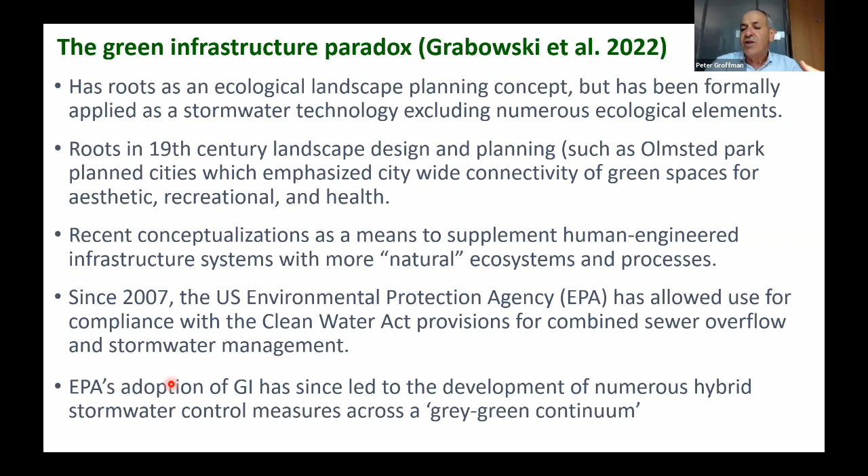Suddenly, all kinds of people, whether landscape architects, designers, artists, engineers, or regulators, said this is great—we can use these approaches to solve our stormwater problems and also provide all these other ancillary benefits. So how is this specified?

There's an important distinction between gray infrastructure and green infrastructure. Gray infrastructure is pipes, and that's been the traditional approach—you collect the water off the street and pipe it somewhere else. If you pipe it into the sewage treatment plant, when it rains a lot, the plant overflows. Even in cities without combined sewers, you collect the water off the street in a pipe and dump it into the stream, which really degrades the stream. So there were lots of drawbacks of gray infrastructure.

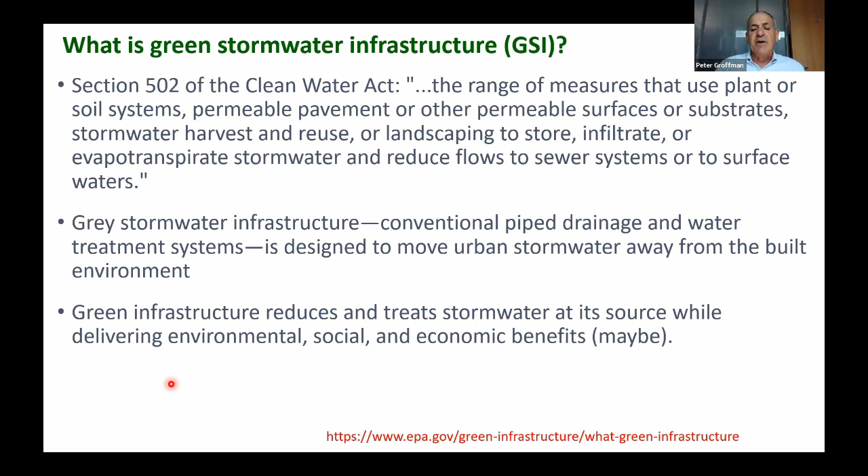The idea was maybe with green infrastructure we could collect and treat the stormwater at its source and deliver a wide range of environmental, social, and economic benefits. That's the idea behind green infrastructure, and again, it's just stimulated this burst of productivity.

So if you look around you, you see some really cool things, whether it's these vegetative swales or these planter boxes.

Or is that my hand that's raised? Let me see. I'm sorry, let's see—is that me?

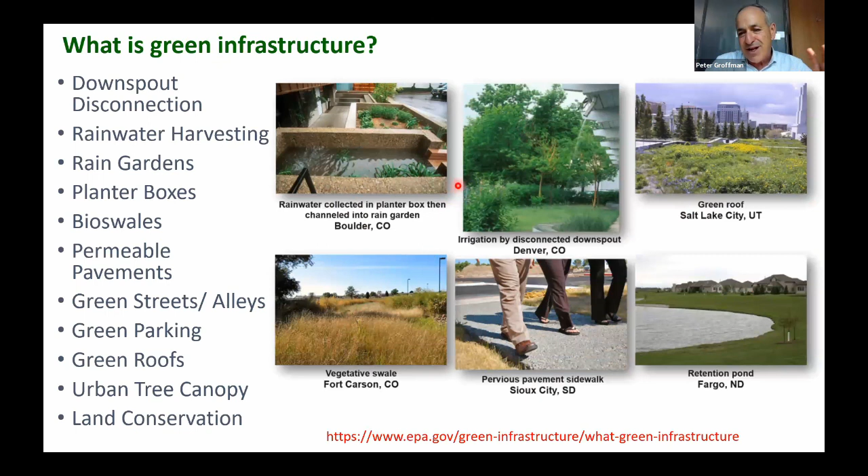Of course, now these are pictures, right? Idealized pictures, and we know what I'm going to talk about today. Now this is the glossy brochure. And then what is the green infrastructure really? The question is, how does it really work out, right? So I'm going to talk a little bit about some of these green infrastructure features you can see in Brooklyn.

That's kind of the question that we're talking about here today: are these things really reliable? How reliable is the green infrastructure? How can we assess that? What do we need to do to increase that reliability?

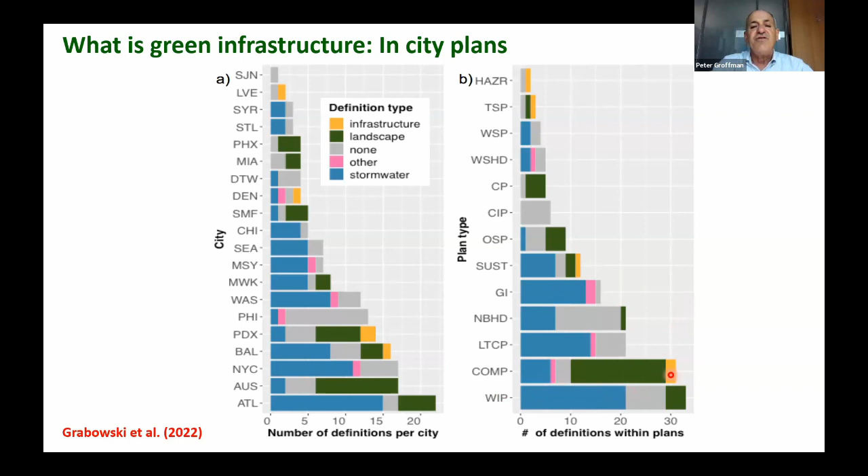He also did a cross-cutting analysis. He said, if I look at all the different green infrastructure plans across different cities—just green infrastructure plans—there's about 15 different definitions within those plans. You look at comprehensive plans, and there's more than 30 different definitions of green infrastructure. So there's really a bit of definitional confusion about just what people mean when they talk about green infrastructure.

And it arises from what Grabowski called the green infrastructure paradox. It's basically the discussion we've just had, that green infrastructure is green space in cities, going back to the Hanging Gardens of Babylon—people have always needed this interconnected network of green space that provides natural ecosystem values and functions for humans in a city. Okay, so that's the traditional, old-fashioned definition of green infrastructure.

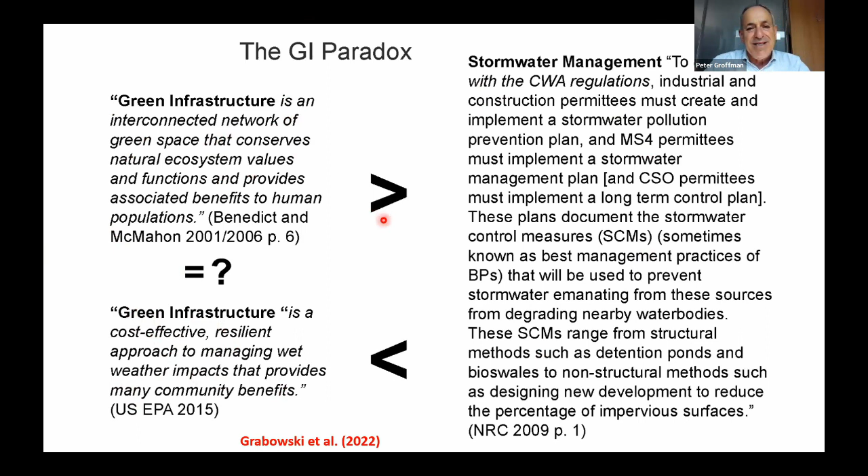But then there's the EPA definition, where you get the idea that we're managing stormwater. So if you want to combine those things, he proposed a new definition which integrates them: green infrastructure is a conceptual framework for considering the relationships between ecosystems, the built environment, and people. It recognizes that interface between ecological and technological elements across scales, and tries to create a more comprehensive, holistic definition, which should allow us to recognize the scope of green infrastructure. I think it should allow us to address some of these evaluation issues that we're going to talk about as we go forward. So that's a new definition of green infrastructure.

Another way of looking at it—another postdoc I've been working with, Marissa Matsler, was thinking about green infrastructure along what she called an eco-techno spectrum, or ecological-technological spectrum. I think this is really useful in a couple of ways. If we think about the scope of green infrastructure in a city, we've got a bunch of natural systems—basically wetlands and remnant forests that are pretty much really strong on the ecological end of things.

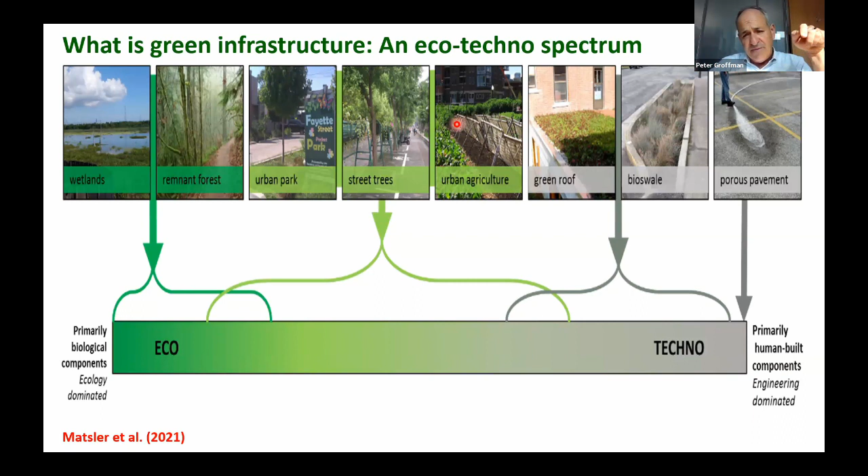And then on the other end, you have a lot of things on the technological end—porous pavement, bioswales, which are very engineered and very technological. And they have a bunch of things in between, like parks, street trees, and urban agriculture, which are kind of a mixture in the middle of this eco-techno spectrum. This spectrum is useful when we're talking to people about what kinds of plants are useful in these different types of green infrastructure features, and it lets us get the scope of green infrastructure. But it also allows us to ask some functional questions.

So when we think about green infrastructure, we have social questions, political questions, financial questions. Who interacts with which types of green infrastructure? What group of people is interacting with these wetlands and remnant forests on the ecological end of things? What group is interacting with the features on the technological end? Are there equity issues associated with which groups get to interact with which different types of green infrastructure?

There's a political dimension—who's making the decision about installing green infrastructure, or managing it, or protecting it? And does that vary along this eco-techno spectrum? You'd suspect that it does, that the people making decisions about wetlands and remnant forests are very different than the people making decisions about green roofs and bioswales.

And then there's the financial dimension—who's paying for these features. As we get really interested in installing features for different purposes, the finance question becomes very important: who is really interested in building bioswales and porous pavements, and why? Who's interested in protecting wetlands and remnant forests, and why? This idea of an eco-techno spectrum helps us grapple with the scope of green infrastructure, and also to do some more pointed analysis about who's benefiting, who's making the decisions, and who's paying as we go along.

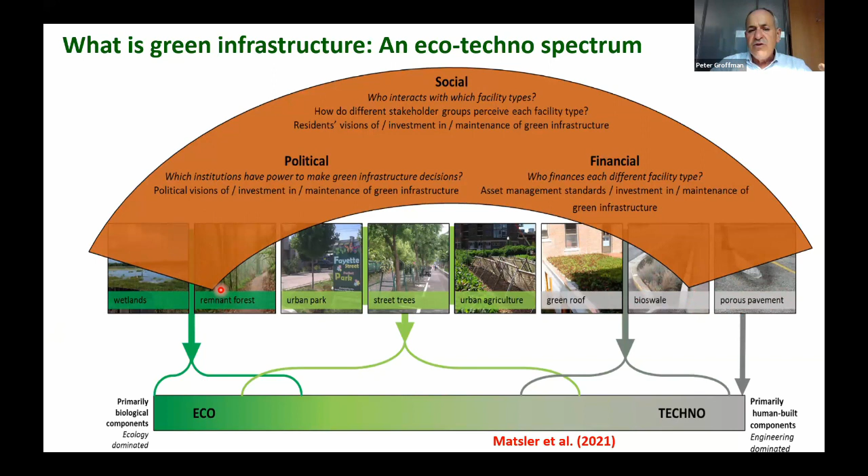Okay, so that's my introduction to the scope of green infrastructure. I've tried to be brief about it, but I hope you get that there's a challenge, though I think we've made progress with our definitions and scope. There's a lot of questions about how well it works, and I'm going to show you that picture of the green infrastructure in Brooklyn - I'll show it three times during this talk, because when you go out and look at some of these features, and I'd encourage you all to look at the green infrastructure in your neighborhoods, some of it looks great, some of it looks a little sad, and there are just a whole bunch of questions about whether it works.

So I'm going to give some examples from this Urban Resilience to Extreme Events project, and some examples from Brooklyn and Baltimore, where I've done a lot of work for a long time, and highlight some of the challenges that we have.

So I was involved, and several people at CUNY were involved, in this Urban Resilience to Extremes Sustainability Research Network. This was funded by the National Science Foundation. It was a network of 10 cities in the United States and Latin America, addressing this question of urban resilience to extremes and what the challenges are in addressing that.

The UREX project, or Urban Resilience to Extreme Events, had a very strong conceptual basis, focusing on cities as what they called socio-ecological-technological systems.

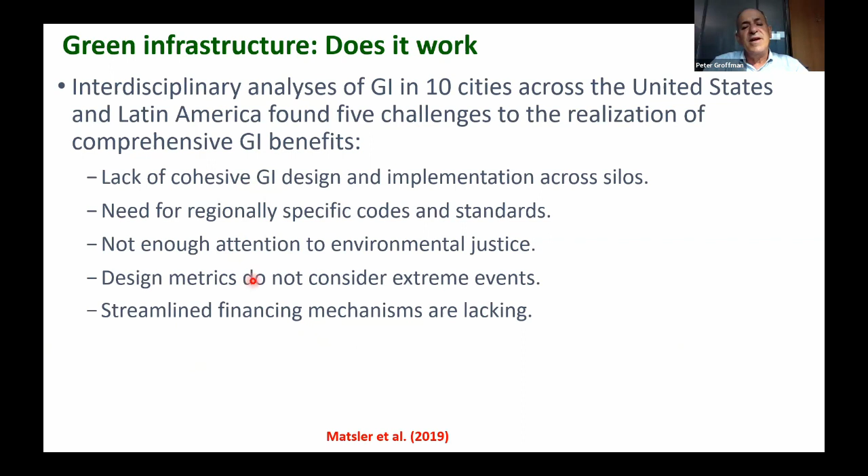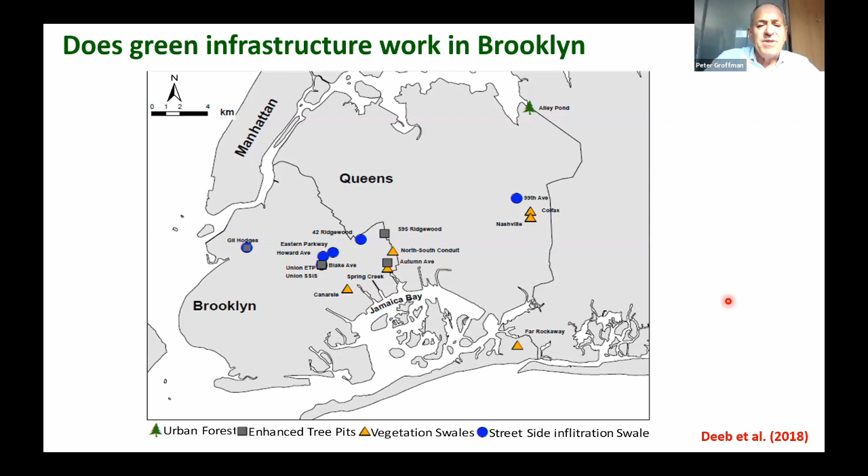Let's take a look at some of the work we've done in Brooklyn. This has been mostly led by Joshua Cheng, a professor at Brooklyn College, in collaboration with the city, establishing lots of green infrastructure sites in Brooklyn. Here are these pictures I showed you before. We're asking these sites to do a lot, asking these plants to grow and live under some pretty difficult conditions.

Think about on a hot summer day when it rains and the water comes rolling off the street into this green infrastructure. How hot is that water? The first flush of runoff off a pavement is really, really hot. So if you're some type of beetle or bug or plant, that first flush of water might cook you. And of course, what else is in that water? There's all kinds of pollutants in it.

So there are real questions about how reliable these systems are, since they're designed to be connected to the street. Just a little data: we were looking at three different types of green infrastructure in Brooklyn - enhanced tree pits (ETP), street side infiltration swales (SSIS), and vegetated swales (VS). The ETPs are the ones really tightly connected to the street. SSIS are also pretty well connected, and the vegetated swales are more isolated from the street.

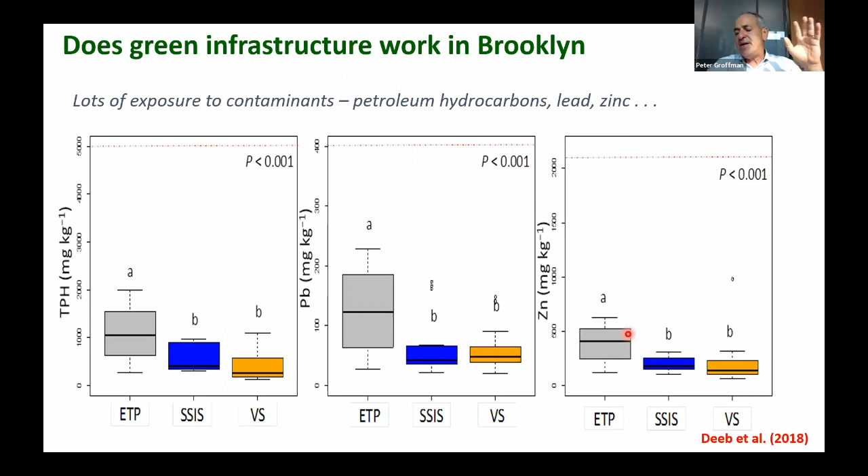But what effect does that have on the plants and soil processes we'd like to get in the green infrastructure? This accumulation of contaminants is a big issue with green infrastructure. But in our measurements, we see that the biological function is maintained pretty well. We're measuring microbial processes - the living carbon and living nitrogen in the soil, and the respiration of the microbes, and the nitrogen cycle. The levels of biological function are quite high in these highly connected, more highly contaminated sites. So yes, they're accumulating contaminants, but the biological function is maintained, at least so far.

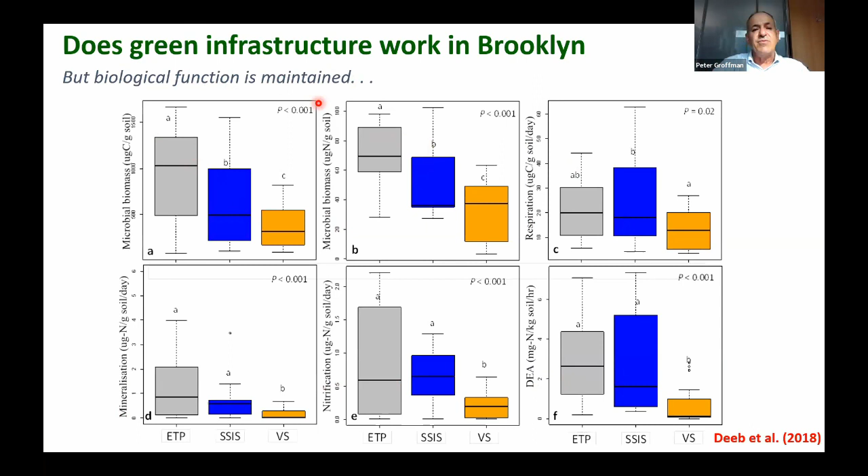This is an interesting science question with great uncertainty: how much contamination is going to accumulate in these features? And at some point, will it start to affect their function? That's a research question we hope to continue.

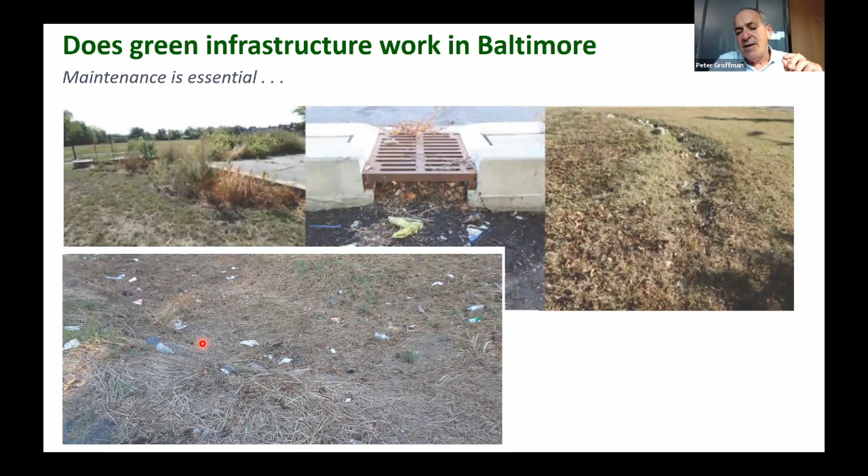The other question - and we've been doing a lot of work in Baltimore, which has a lot of green infrastructure and is a poorer city than New York - is the question of maintenance. There's a lot of trash that comes floating down the street. If you look at these swales, they accumulate trash. You look at the entrance to some of these features and they fill up with natural debris and also with trash, which causes the features' function to fail. It certainly doesn't help maintain public support for these if they're getting filled with trash and failing. And we work in Baltimore.

These features are unpopular in this neighborhood. So we're out working there, and people come by and say, well, what is this? Actually, they say, what the bleep is this? And how much did it cost?

So then we say, okay, to design, construct and implement this feature is about $60,000. And people get angry. $60,000 in this neighborhood - we've got problems with rats and with food insecurity and with education and childcare, and you're spending $60,000 to build this, and then they lose parking as well.

So this kind of hit us pretty hard, because we realized that we're very excited about green infrastructure, but is it taking an area which already has big environmental justice issues and making them worse? This to me is a huge frontier in green infrastructure. We've got to be doing community science - there's a group, this EcoFlora group, doing community science on plants. We have got to be doing community science on green infrastructure.

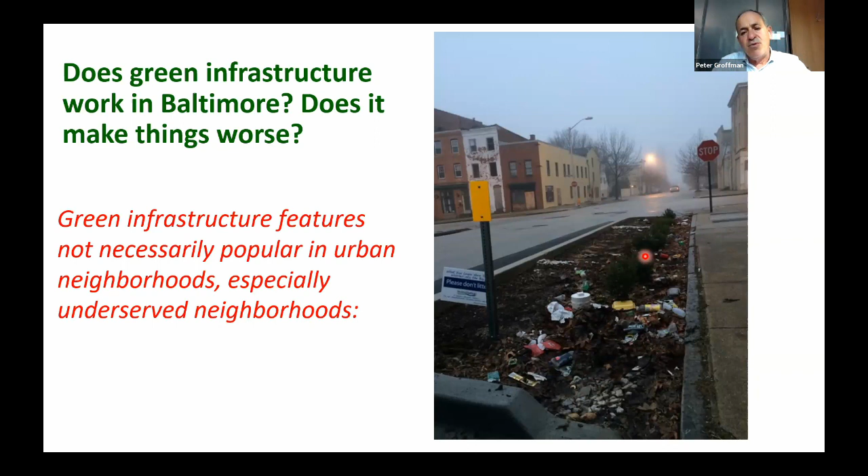This turns out to be quite a challenge. I wanted to highlight an effort led by the Science and Resilience Institute at Jamaica Bay, based at Brooklyn College, to develop a protocol for monitoring the natural and nature-based features along shorelines in New York State. There's a lot of interest in natural and nature-based features along the shoreline. Ever since Hurricane Sandy, we realized that we needed to improve and secure our shorelines and increase their resilience.

Again, it is very similar to the eco-techno spectrum. If you think about shoreline features, we have a bunch of natural features like natural dunes and natural marshes and oyster reefs. On the other extreme, we have hard structural features like bulkheads and various engineered features. And then we've got a whole bunch of things in between. There's really exciting interest and a lot of money being spent to implement these features across the state.

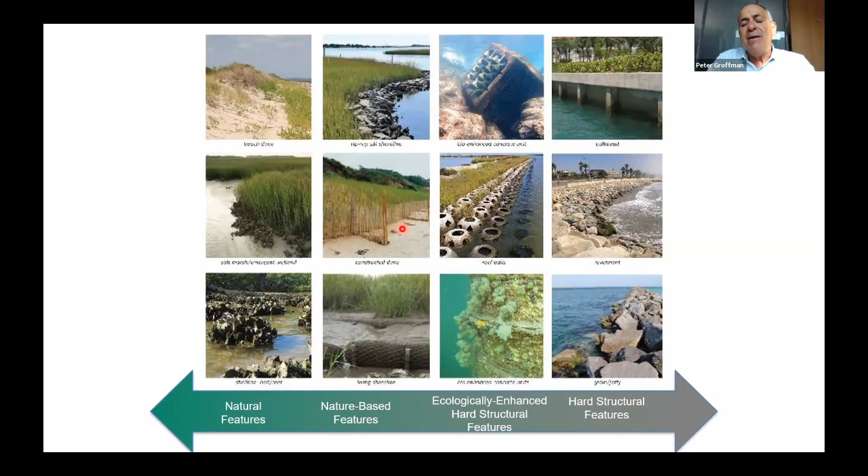Now the question is, are they worth it? Are they working? We need to know if they're working now, if they're working over time, and if they're working in multiple dimensions. So creating a monitoring framework turned out to be a really interesting and complex endeavor for us.

We wanted to create a monitoring framework that needed to meet many criteria. It had to be a coherent framework based on a strong scientific and technical background. It had to have broad buy-in from agencies, from practitioners, from civil groups, and it had to be applicable across all of New York State, which is a diverse coastal environment. So let's talk about some of these challenges.

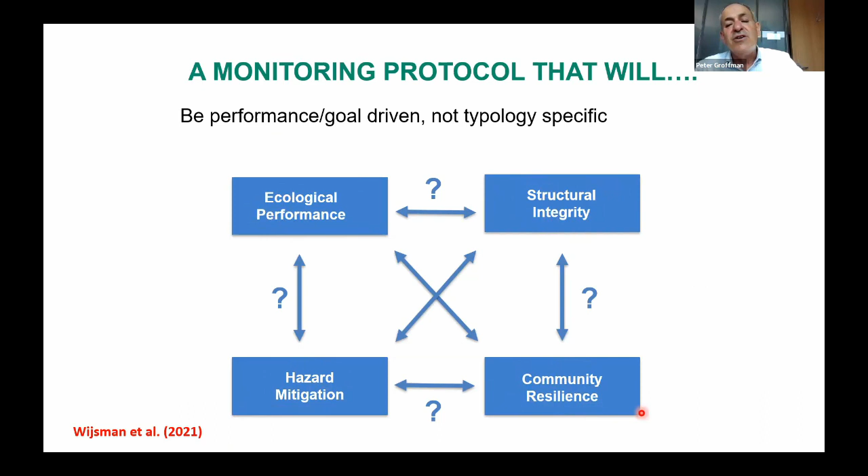If I have a natural and nature-based feature, I want it to do many things. I want it to maintain structural integrity of the shoreline. I want it to provide hazard mitigation. But I also want to know, is it providing some ecological benefit? And is it providing some benefit to the community? So right away, I've got a protocol that's got to address four very different areas - that's a complex protocol.

I've also got to have a protocol that's going to apply across New York State. New York State has a lot of shoreline, right?

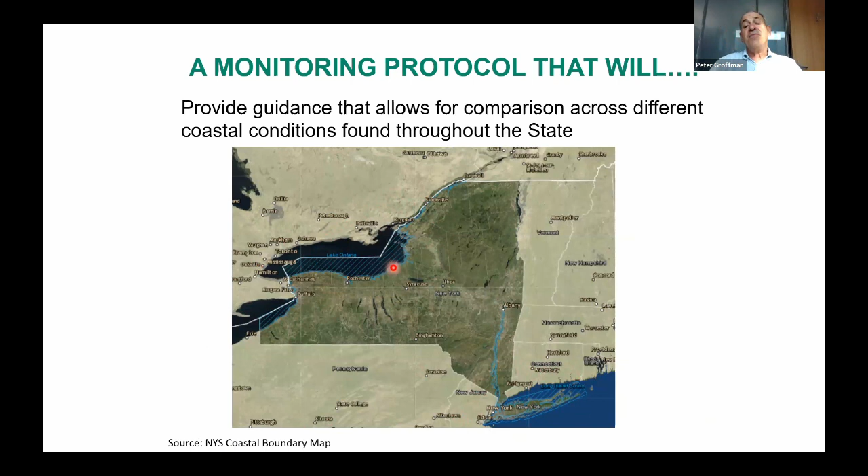So we think about the ocean and the Long Island Sound shoreline, but there's a lot of shoreline along the Hudson, and then along the Great Lakes. This protocol had to be relevant across all those different parts of the state, and accessible to a wide range of audiences. Some people are deep into the technology, whether consultants, engineers, or academic groups up on the latest tech, but there are also stewardship groups, permit regulators, property owners, and community groups, and the protocol needs to make sense to them.

We'd also like a strong community science approach involved in this protocol. So now I've got a protocol that's got to be relevant to a wide range of audiences, applicable to a wide range of environments and feature functions, and it's got to apply to all different kinds of projects—large, expensive projects on natural nature-based features, and small ones too. They all seem to be pretty expensive, but it's got to apply to a bunch of different projects.

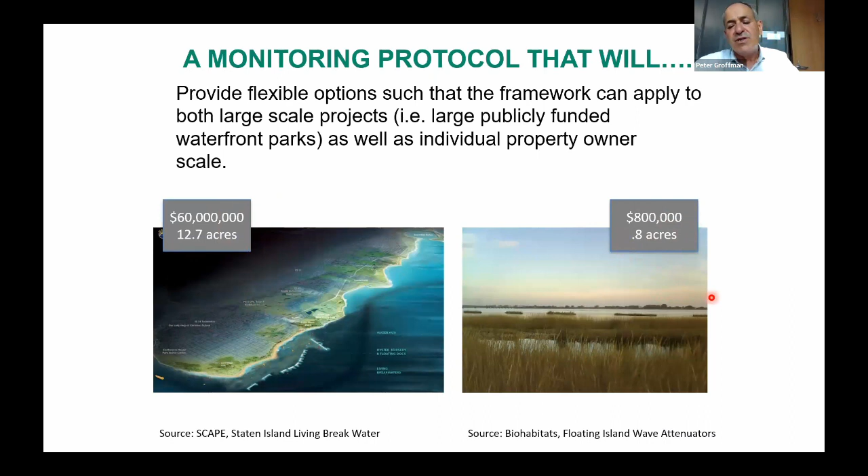I don't know how many of you are familiar with Monty Python and the Holy Grail, but in that movie, King Arthur and his knights run into these fearsome knights who say 'Ni.' They say you cannot pass through these woods, you must return here with a shrubbery. Arthur says, sure, I'll bring you back a shrubbery. But they said, not just any shrubbery—it has to look nice and not too expensive. That's indeed the case with these natural nature-based features.

It had to be a very comprehensive and scientifically rigorous evaluation protocol, but also one that was not too expensive and that could be used by all different kinds of community groups. So it's really quite a challenge.

And we're left with the question, going forward—and this is still ongoing—we're building these natural nature-based features. Are they really doing what we hope they're going to do? Are they providing ecological function, hazard mitigation, and socioeconomic value? Can our framework assess this value? Can I go out there and see if this site is really worth what it's doing? And I want to go back every 5 years to these sites and assess changes in these values over time.

So we're going to go back to the Knights who say Ni. We're going to bring them a shrubbery, and hopefully they're going to say, yes, it's a good shrubbery—they like the shrubbery. But this is again an ongoing challenge to evaluate. We really need to know if the green infrastructure and these natural and nature-based features are functioning.

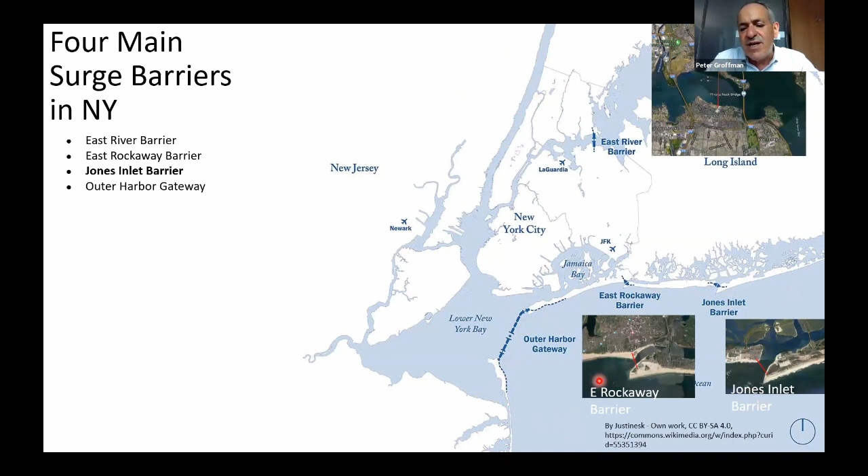There are all kinds of barriers you can build: around Jamaica Bay, for Jones Beach, on the East River. The ideas for these have changed, but there's an active discussion about whether we should build these enormous barriers. You can see the East River one, the Jones Inlet, the Rockaway Barrier, and then the really big one, the Outer Harbor Gateway.

The idea of giant flood walls is based on fail-safe, an old engineering principle based on risk analysis. You ask: what's my threat? What's the probability of the threat? What are the consequences of that threat? So I'm going to design some really big infrastructure with a low probability of failure. I'm going to make it oversized, and I'm going to be safe behind this giant wall.

But the question that emerges now is what happens when these solutions fail? Big levees and flood walls keep you safe until they don't, and then the damage is catastrophic. The best example of that was Hurricane Katrina, where there were these levees creating a false sense of security, and when they failed, they amplified the overall damages to the city.

Things like Sandy and Katrina have really focused the idea that maybe we need to revisit this whole idea of fail-safe technology. The jargon term for it is non-stationary—we can't predict the climate, we can't predict the size of storms, we can't predict what happens in cities, like maybe people will stop coming to work every day, or maybe we'll get more intense rainstorms. This difficulty in estimating weather, population growth, and social demographics has made people say we need a different approach than fail-safe, because the probability of failure is much higher in a non-stationary world.

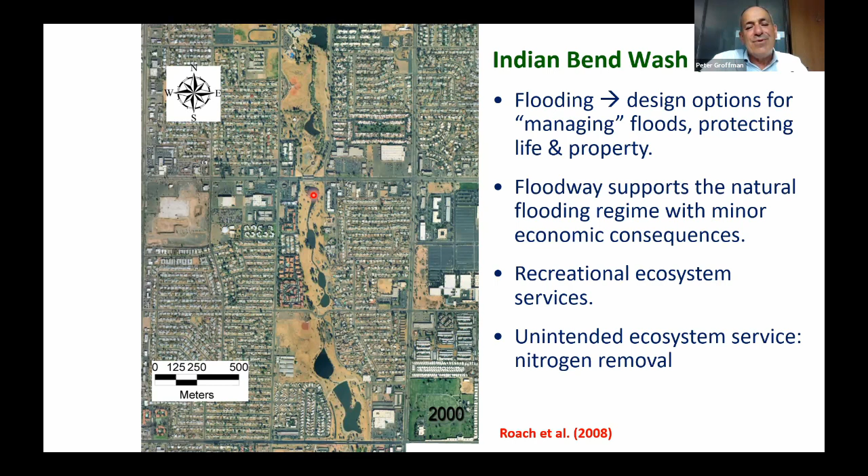This is a classic example of safe to fail. So where we're going to let the water come, we're going to minimize the consequences of the flood, and then we're going to let the flood water drain away carefully. Indian Bend Wash is to me a good example of a safe to fail type of example.

And the contrast is the Los Angeles River, which was a nice desert stream in 1900. And they had a bad flood in Los Angeles, I think it was either 1938 or 1942. And they said, okay, that's enough, and they built this enormous concrete channel. And the Los Angeles River is kind of an eyesore through the city.

So the question is, what are we going to have safe to fail in New York City? I think we've really got to think about this, and we've made some progress already, because for one thing, there's a lot of things that the giant wall won't control. Even if you build a barrier across the harbor, think about Hurricane Ida, right?

It's almost like we were all looking out to sea, and then boom, the flood came from behind us. It came from the land. So we're going to have to think about whether we're going to build a lot of walls all over the city, or come up with some clever ideas to minimize the consequences and maximize the recovery.

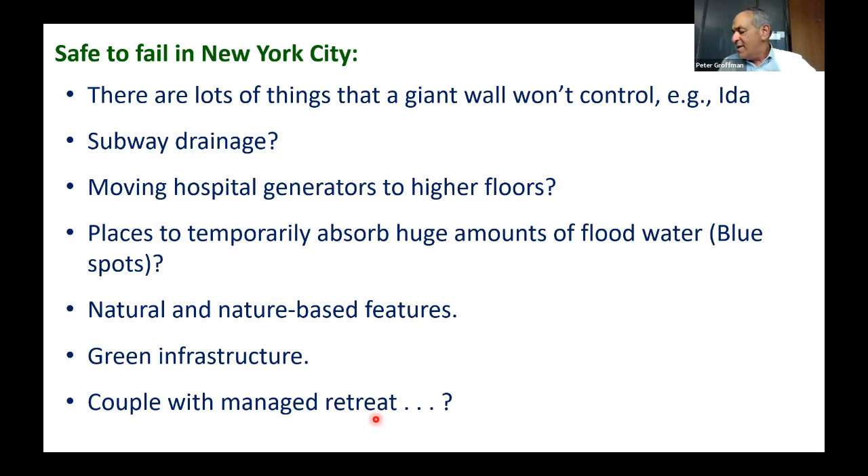And we've already made some progress. The water drains out of the subways much more quickly than it used to. We had backup generators during Sandy, and they were all in the basement. They've been moved to higher floors. I'll talk a little bit about this idea of making blue spots, which are places to temporarily absorb huge amounts of flood water. Then there's a big role for natural and nature-based features and green infrastructure, and possibly managed retreat. But we'll see if I have time to talk about that.

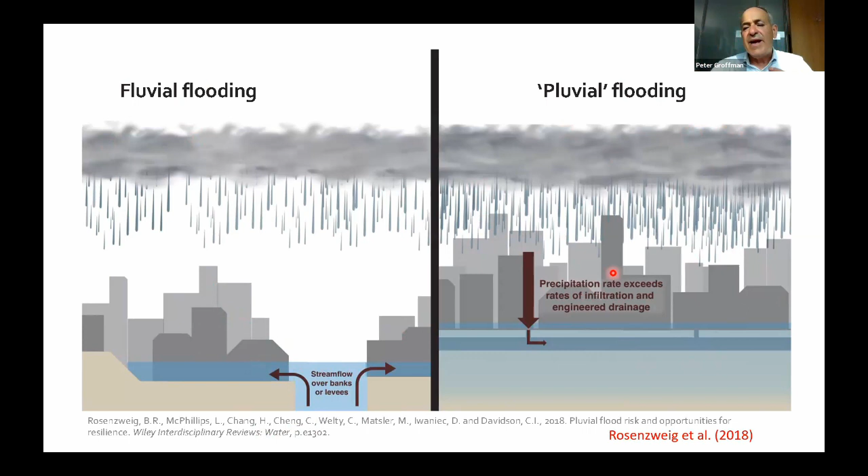I wanted to highlight, when we think about blue spots, the work of Bernice Rosenzweig, a professor at Sarah Lawrence College, who's been spending a lot of time thinking about pluvial flooding, which is a term you may not have heard. Fluvial flooding is when a river overflows its banks - it rains in the mountains, the water comes down, and the river floods. Pluvial flooding is what we had with Hurricane Ida, where it just rained so hard that it exceeds the rate of infiltration that the engineered drainage can absorb, and so you end up with flooded streets.

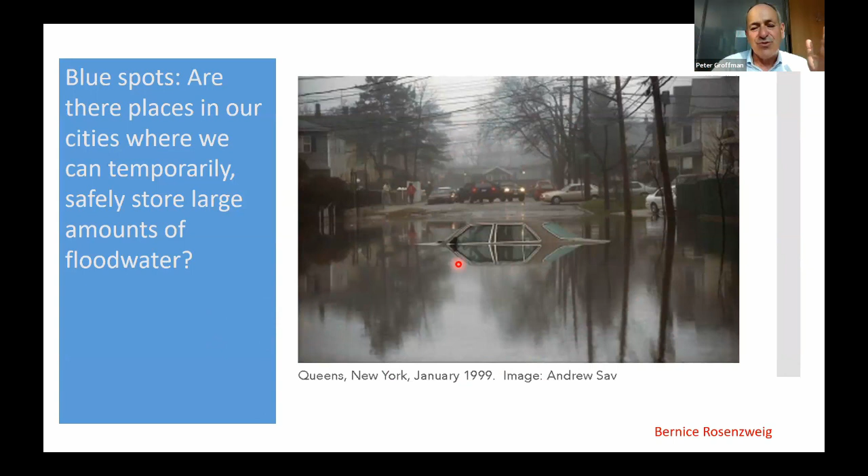This is kind of another state-of-the-art area, but it's going to involve a lot of work with vegetation and parks and spontaneous vegetation and community science. I threw this in here because it's another issue that I think this group has a lot to contribute to. So there's blue spots. And the last thing I wanted to talk about was this idea of managed retreat, which is again another issue where people who think about plants and spontaneous vegetation need to think about it.

So the idea of managed retreat is the idea that maybe there are certain places where people shouldn't be living, that we should abandon certain areas. We should move human development out of harm's way and restore these natural areas to enhance their ecosystem services.

Now, this is an idea that's developed with academics, and there's lots of good academic thinking about what kinds of planning and programs you need to facilitate managed retreat. There's some pretty good ideas about what conditions allow managed retreat to succeed. As an ecologist, this is everything we hope for.

Thinking about an integrative approach and using natural processes to solve environmental problems. But managed retreat makes a lot of sense to me, but how's it going to play out? I don't know if you've thought much about managed retreat in New York City, but there was a bunch of it, in particular in Staten Island, where there were neighborhoods where people were like, we don't want to move back. And this was a huge surprise, because most people's natural reaction to a disaster is we're going to build back, we're going to build back better, we're going to come back.

There was a woman, Elizabeth Koslov, who was getting her PhD at NYU, and she was studying the response of different neighborhoods to Sandy. She went out to Oakwood Beach in Staten Island, and she saw that people were campaigning for the city or the governor to buy out their homes. It was a real shock to her, because there's this idea that people always want to build back, but here was a neighborhood that had flooding problems for years, and maybe the idea was maybe we should retreat from certain areas.